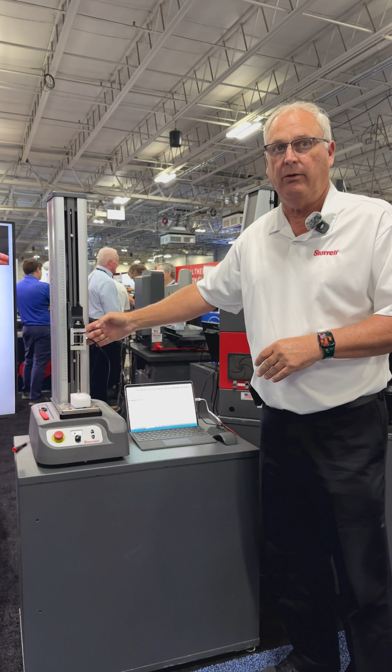Today we're here at the EASTEC show and we're showing an FMM, the force measurement machine. This particular model is the 550 model, so that means it'll go up to 550 pounds. But we've got a much smaller load cell on here, only a 50-pound load cell. So basically the machine resizes itself for the capacity of the load cell, going from a 550 to a 50-pound machine.

On this little application here, we're actually testing some foam. We're going to come down and find the top of the foam, and then it's going to reset itself, and then go down to 2 pounds, and then back up to a half pound. It's going to do that in a cycle motion twice so we'll be able to see the graph. It's as simple as hitting the start button right here—just press it and it'll be automatic.

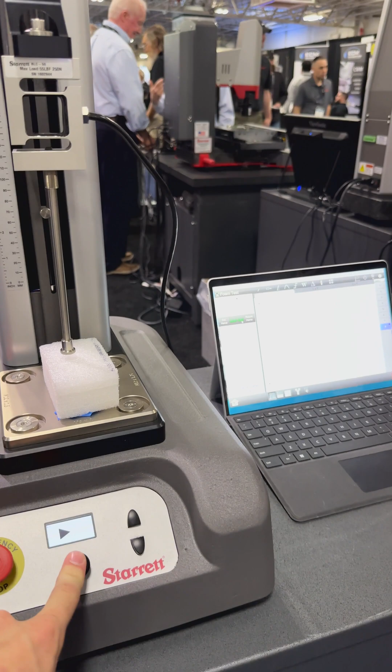Now it's actually finding the top of the foam, so it's coming down very slowly. That's where the light blue is, showing you what it's doing. It's going to find the top, reset, and then go do the test. So it went to 0.2, and now it's coming back to 0.

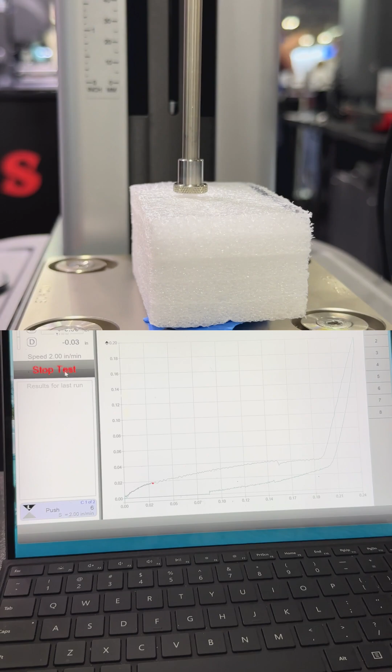It's going to start going back up and load, going to 2 pounds, and then back down to a half pound. It hit 0, and now it's going up to 2 pounds, and when it reaches 2 pounds, it's going to turn around and come back to a half pound.

You're actually looking at how quick the foam recovers. Whenever it's compressed, like the seat of your car, you don't want it to stay compressed for too long, so you want it to recover quickly. It repeats the process, and at the end it goes back home.

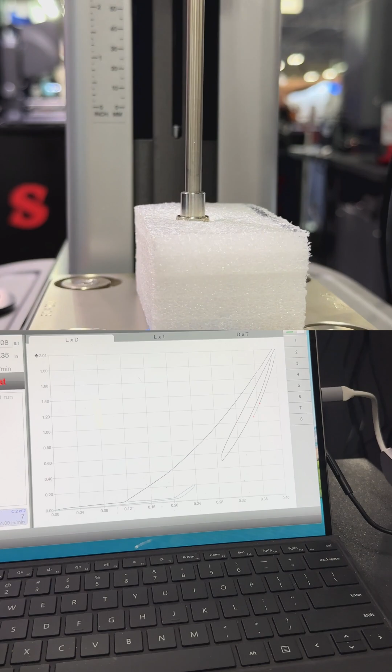Today we're going over Starrett's trigger pull fixture. So first things first, you want to cock it up, pull up, press the release button. Now it's released again, so now it is cocked and ready for our test.

So we're going to hit start test. What I have it doing is pulling up and finding the actual touch of the trigger, and now it's starting to pull. You're going to see it click in just a second. These things are so accurate that you can actually use that to find the weapon amongst all the other weapons.

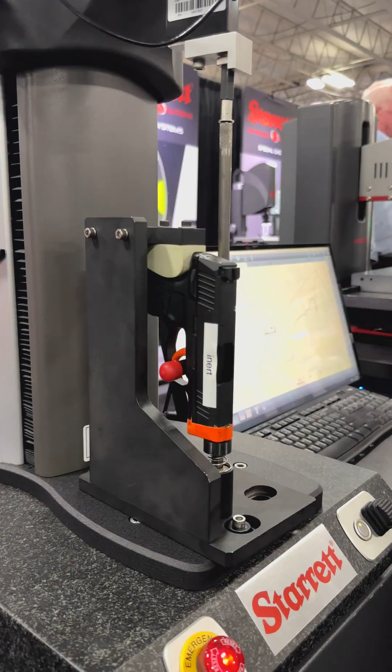Now the test is over. The most important thing you want to get out of this test is the repeatability of the trigger. So if we go back and look at some of our tests that we've done in the past, I would say that's pretty repeatable, wouldn't you?

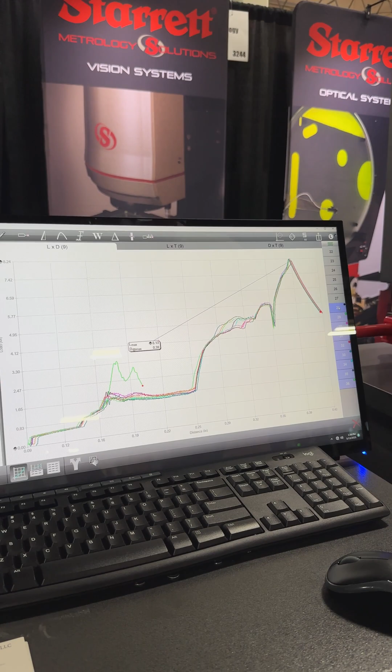Something that all manufacturers are doing or starting to do is record it. Just like the rifling out of a barrel, the trigger pull signature is almost equal to finding that weapon. And a lot of times serial numbers are ground off, but if there's no modification on that trigger, you can find that weapon and know the serial number.

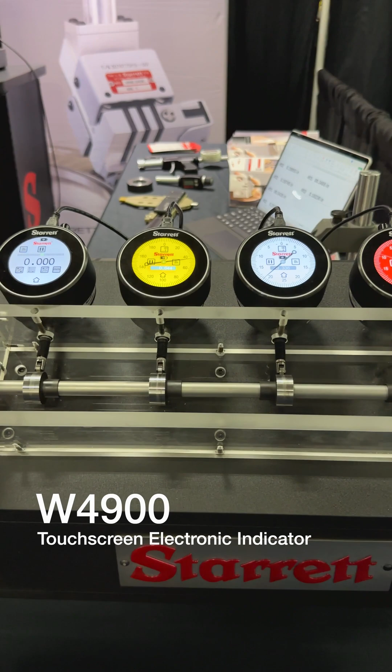This is the W4900 indicator from the Starrett company. It's the only indicator on the market that has a touch screen, and with that, it's programmable. You can change your graduations, and inch to metric conversion is quick.

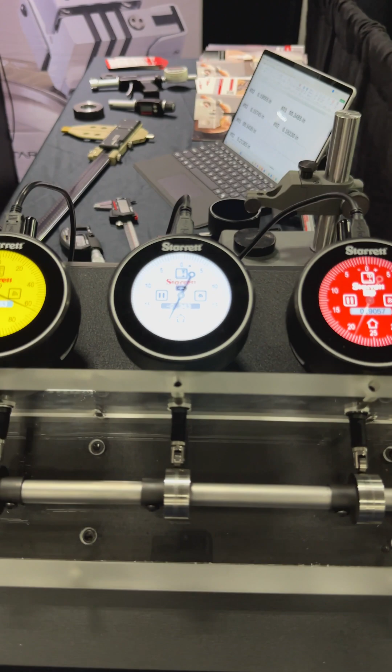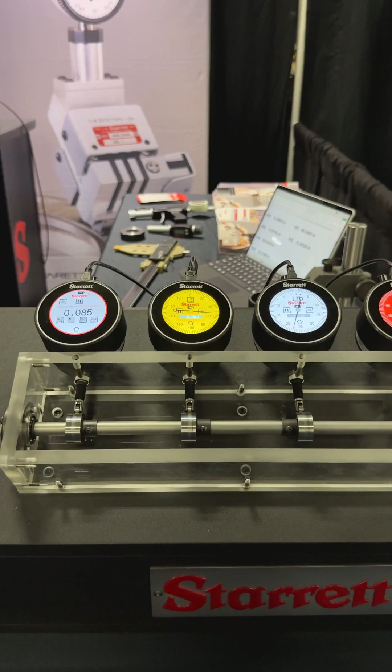You can have a graduated dial display as you see here, or a digital numeric display. You can set limits on it with color coded indicators for out of tolerance and warning, so it's a very versatile indicator. It can do just about anything that any electronic indicator on the market can do, either in an analog appearance or in a numeric display.

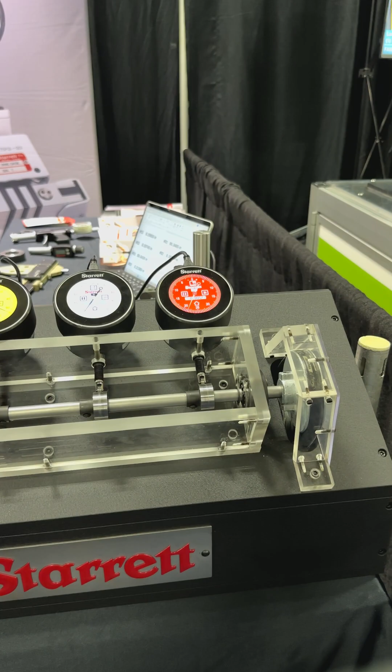It also has data output capability as well. It can be used plugged in, or it has a rechargeable battery. Once again, nothing like this in the market with a touchscreen display, and it's very unique to Starrett and fairly new to the market.

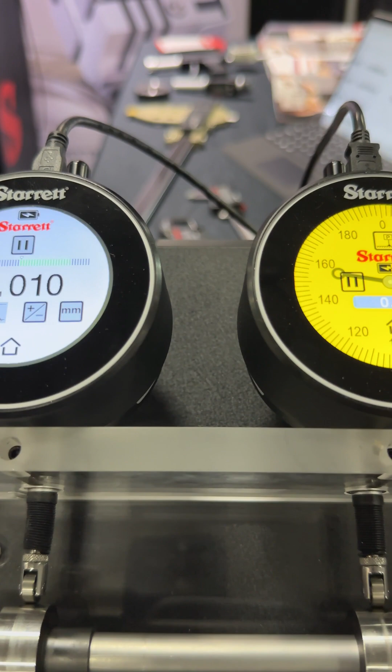This here is our Starrett AVR 200 vertical vision system.

This one has an 8x4 inch stage travel for X and Y, and 8 inches in the Z axis. It's a fully programmable automated system that can run programs fully automated with a one-click start. All you have to do is put a part into the field of view, one click on the screen, and the program will start its execution.

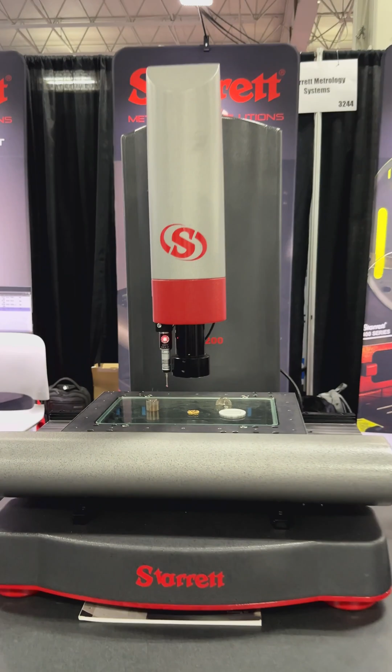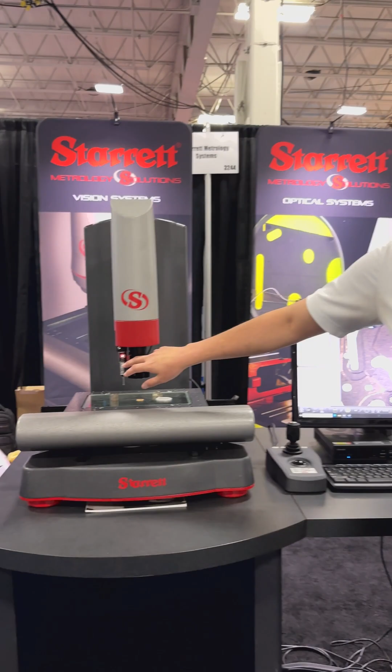This one has a zoom system, so we have about 50x to about 330x true magnification, with 10 magnifications in between. It also comes with a contact probe for Z-axis and 3D measurement, stage illumination from the bottom, top, and through the lens light, and we also have an option for a dark field quad light.

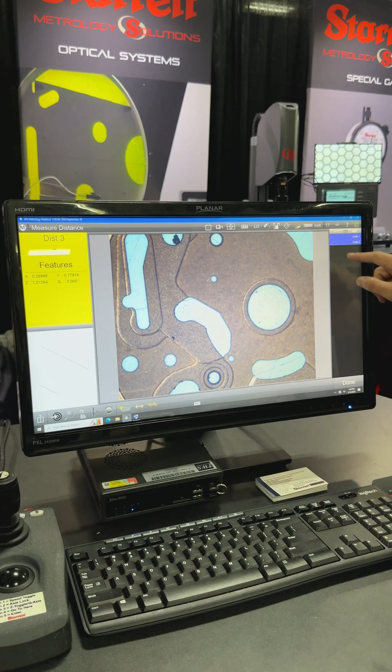The MetLogix M3 software is a touchscreen enabled software, so in order to take measurements, all we need to do is one click on the features we're looking to acquire. If we want to know the distance between points, we select measure distance, select the two features, and then done. We get our distance value right here.

It also has options for telecentric lensing, as well as different size stages. This is our smallest version here, the 8x4 inch. It also comes in a 12 by 8 inch stage and a 16 by 12 stage.

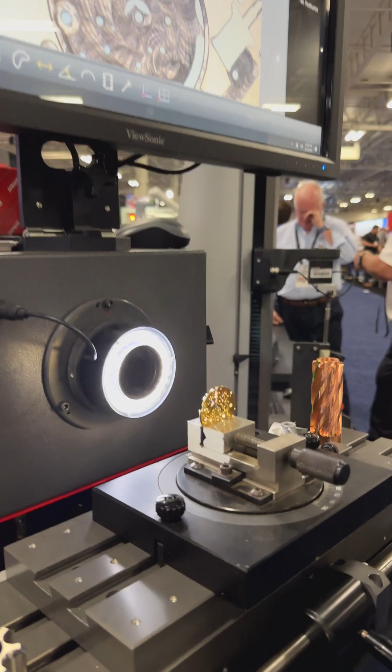So this here is our Starrett HDV 300. It's a digital comparator, the more modernized version of the optical comparator. Instead of using a mirror system inside, it actually uses a digital camera and then the M3 software for measurements. Where a lot of the shortfalls of the old optical comparators existed, this one really gives us repeatability in measurements as well as great surface illumination.

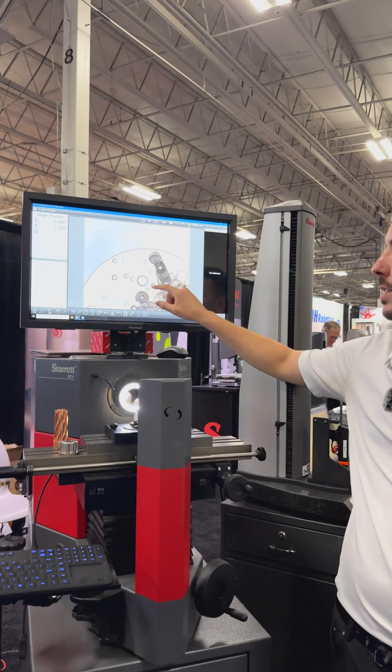So we have our lighting here. We get full color surface illumination, whereas an old optical comparator, you're going to have a lot of trouble trying to see surface features. This one really eliminates all of that. The other thing you have here with the M3 is point and click measurements, so we can just point and click and take our features just like that.

This system comes in manual or CNC, as well as 3 different size options: a 12-inch stage, a 16-inch stage, and a 22-inch stage. This system is particularly good for anything that's a turned part, as you get very consistent edges.

The key benefits to this system are repeatability between users, where with the old optical comparators, you're using whatever the user's eye is to find the edge of a part. This system takes out the user variability.

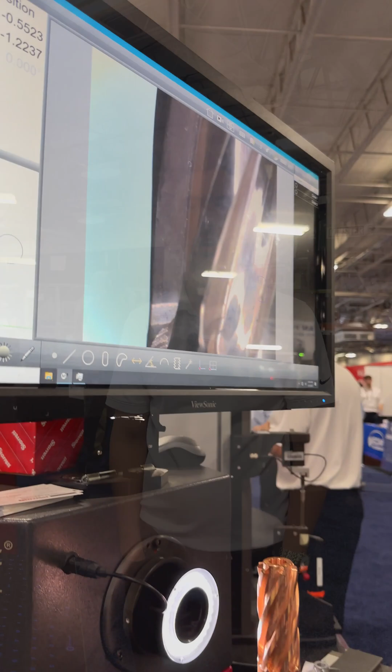With the one-touch measurements, multiple users can get very consistent results from one operator to the next, as well as with different parts. The systems are fully programmable, and when you have different parts, you'll have different programs for each one based on a part number. And the programming is very simple.

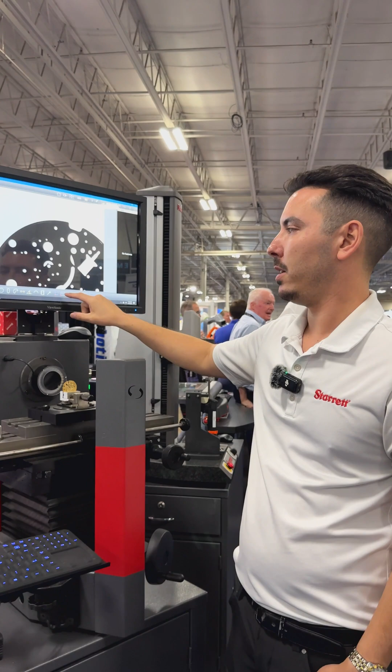All we need to do is select a pattern, create a pattern image here, and then take our measurements that we're looking for. We just go through and click through each one.

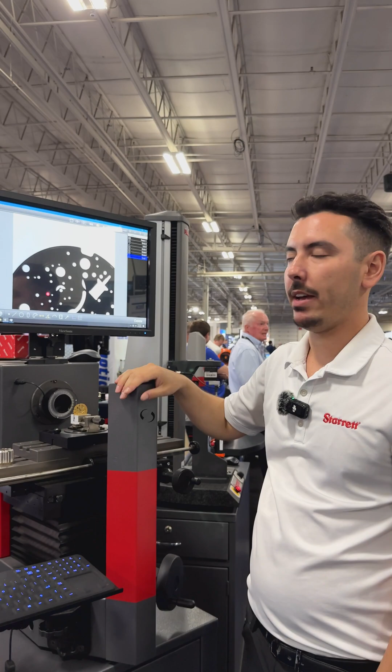In order to play it, we go to the M3 button here, hit play, match up the pattern here, and all we do is one click on the screen, and it's going to go and take its measurements just like that.

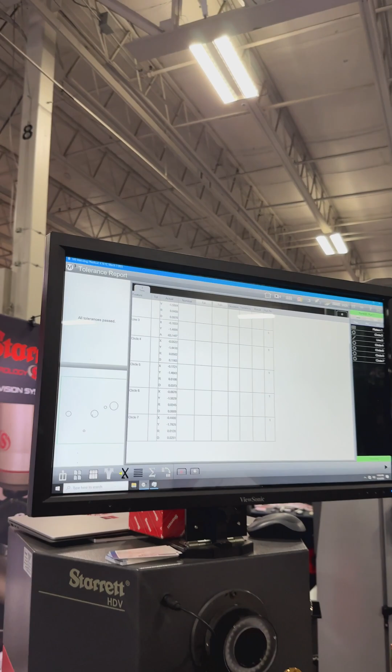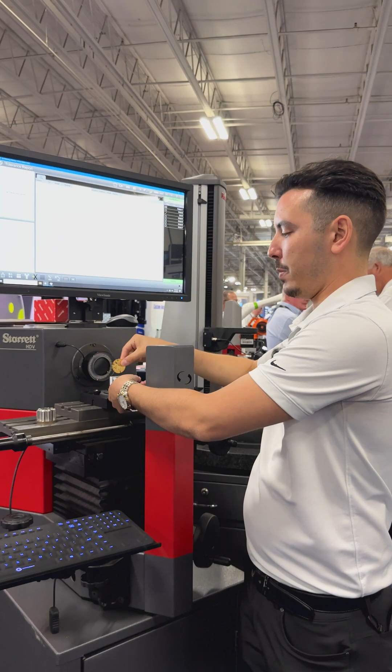Where this really comes in handy is we don't need perfect alignment of the parts. We can take the part out, put it back in not in the same location, and hit new run here. It'll ask if it's in the same location and we say no. Then all we do is move the part into the field of view and one click on the screen. It makes the adjustment based on the rotation of the part, and then we just move it into the circle over here.

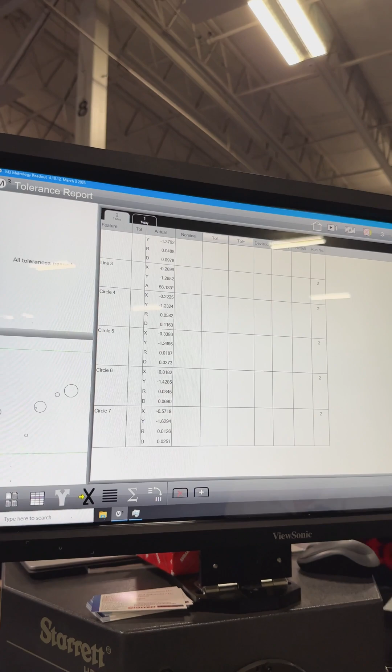You also have a results window here, which will allow you to export and save all of your data for each run.